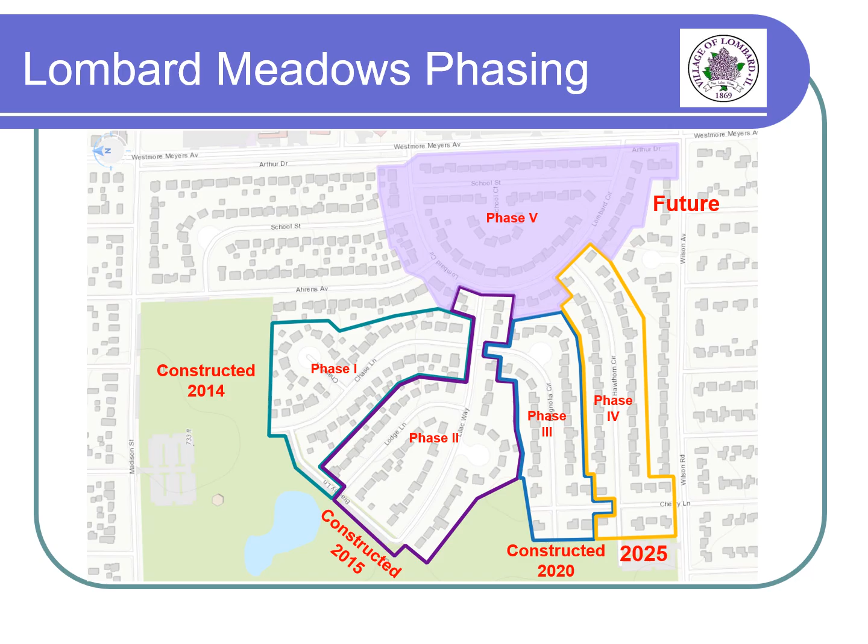Here's a closer look at the Lombard Meadows Phase 4 project area, which is the focus of this presentation.

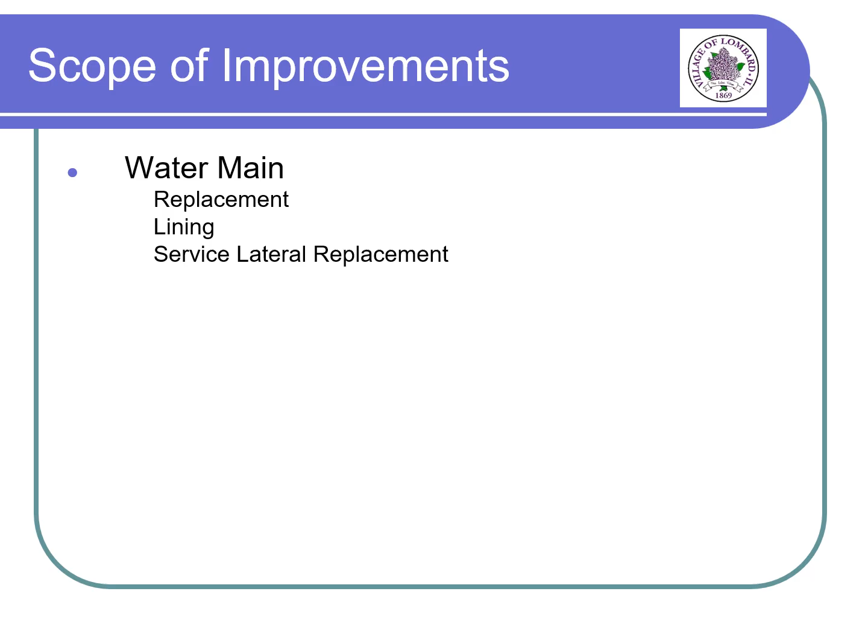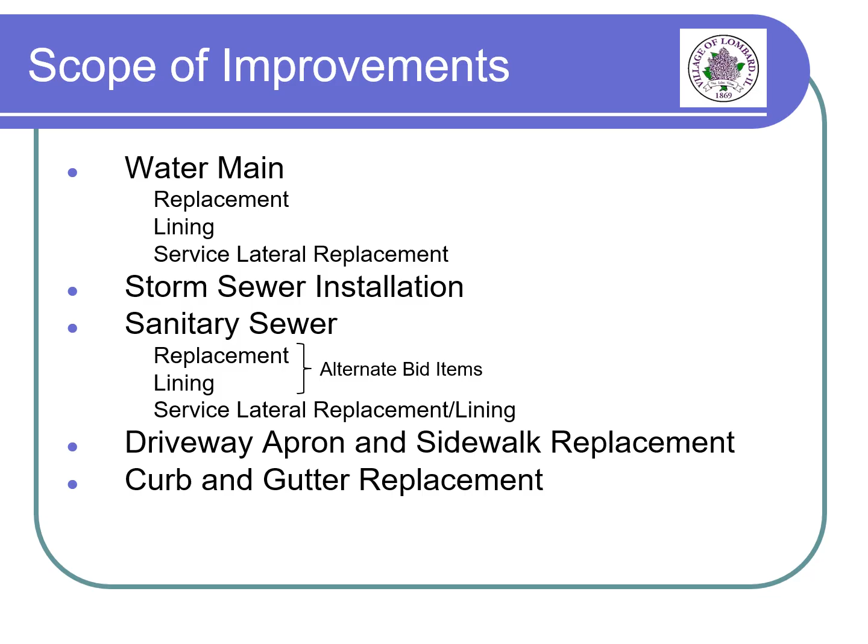The scope of improvements includes the following: replacement and lining of the water main and replacement of service laterals, installation of a new storm sewer system, replacement and lining of the sanitary sewer, including the replacement or lining of the service laterals, replacement of driveway aprons and sidewalks, removal and replacement of curbs, gutters, and asphalt pavement, and replacement of light poles and fixtures.

Now, let's dive into more detail on each of these items.

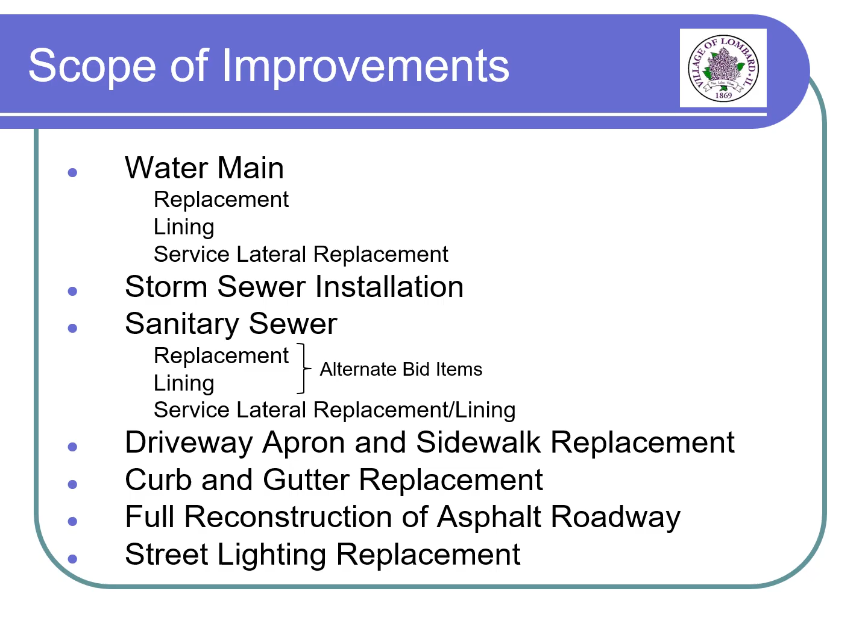The existing water main along Hawthorn Circle and Cherry Lane is primarily 6 inches in diameter and has experienced a history of water main breaks. To address this, the water system will be upgraded to meet the current village standard of 8-inch diameter ductile iron pipe. New water services will be installed from the upgraded main to the property line, each including a new service box. Additionally, new fire hydrants will be installed approximately every 300 feet on center.

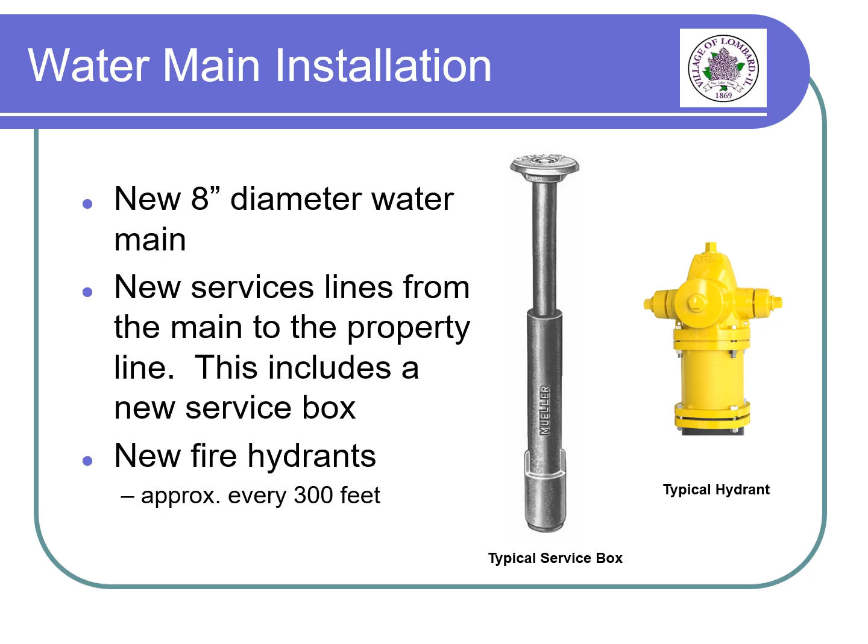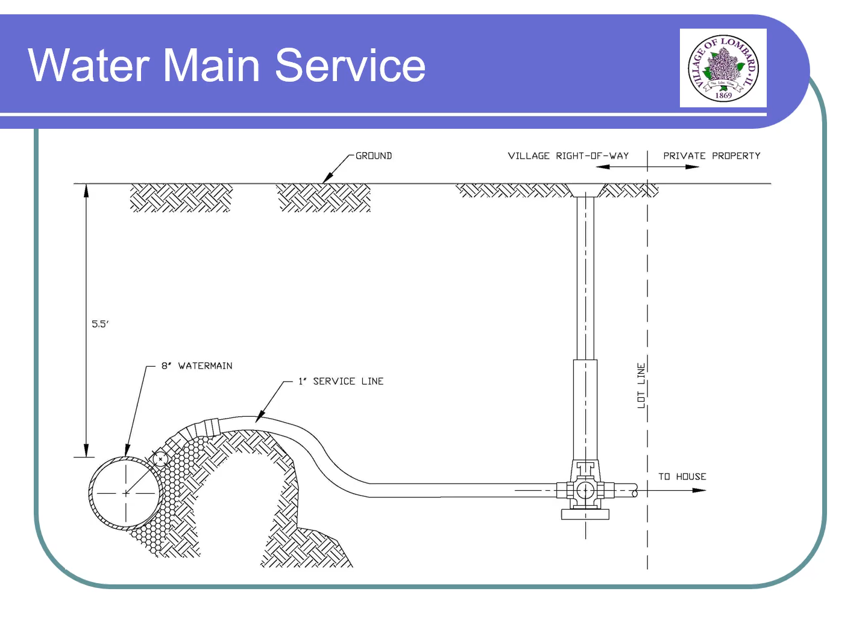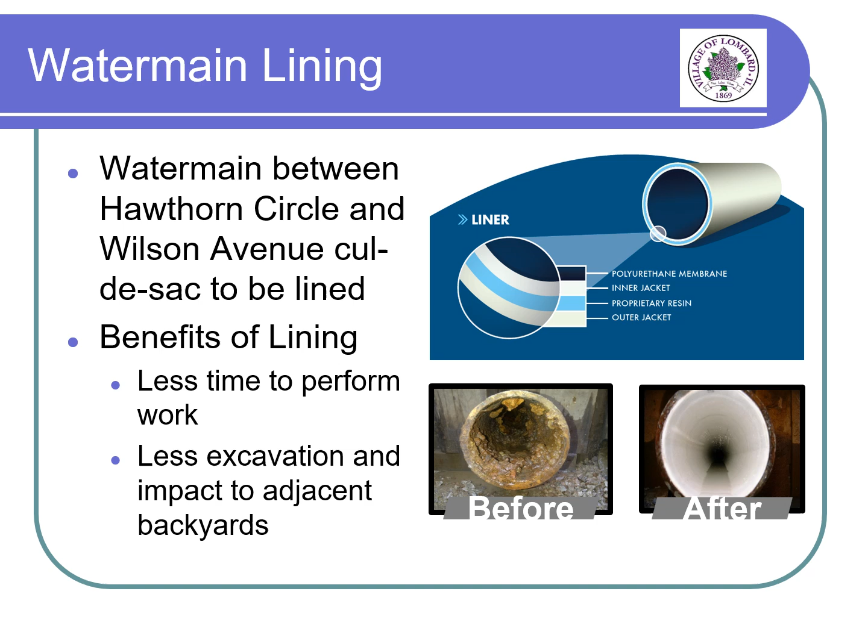There is a 6-inch water main beneath the sidewalk that runs between the side yards of properties on Hawthorn Circle and the cul-de-sac on Wilson Avenue. Like the water main on Hawthorn Circle, this main requires attention due to its age and the increasing likelihood of a future break. However, rather than replacing the main through traditional open excavation, it will be rehabilitated using a trenchless technology called cured-in-place piping. This process restores the structural integrity of the water main while minimizing disruption to surrounding private properties. The result is a water main that functions like new.

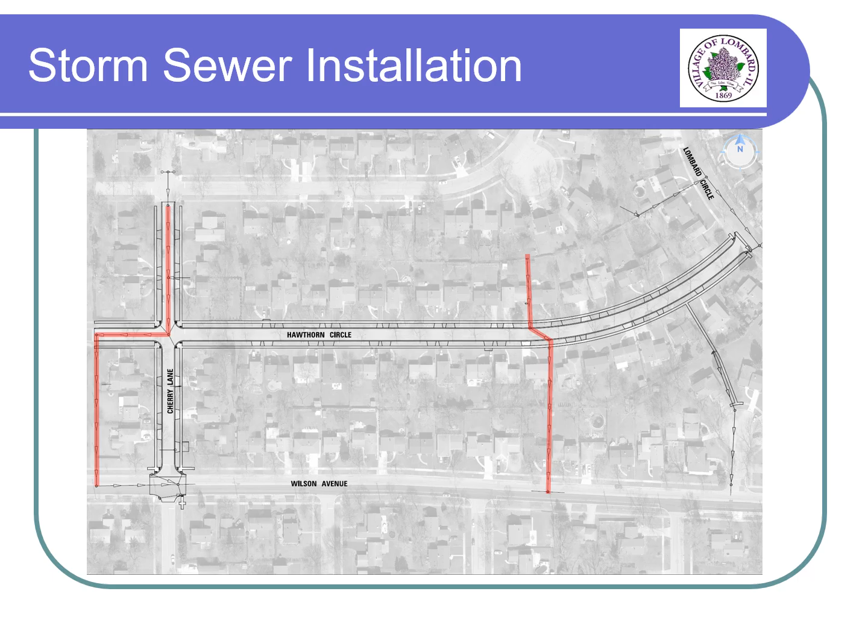There is currently no mainline storm sewer on Cherry Lane between Hawthorn Circle and Wilson Avenue, nor is there a mainline storm sewer on Hawthorn Circle. Only a limited number of inlets are located along the curb line. In the existing configuration, storm sewer pipes run through the side and rear yards, connecting to the mainline storm sewer on Wilson Avenue. To improve drainage, a new mainline storm sewer will be installed beneath both Hawthorn Circle and Cherry Lane, with additional inlets placed along the curb line.

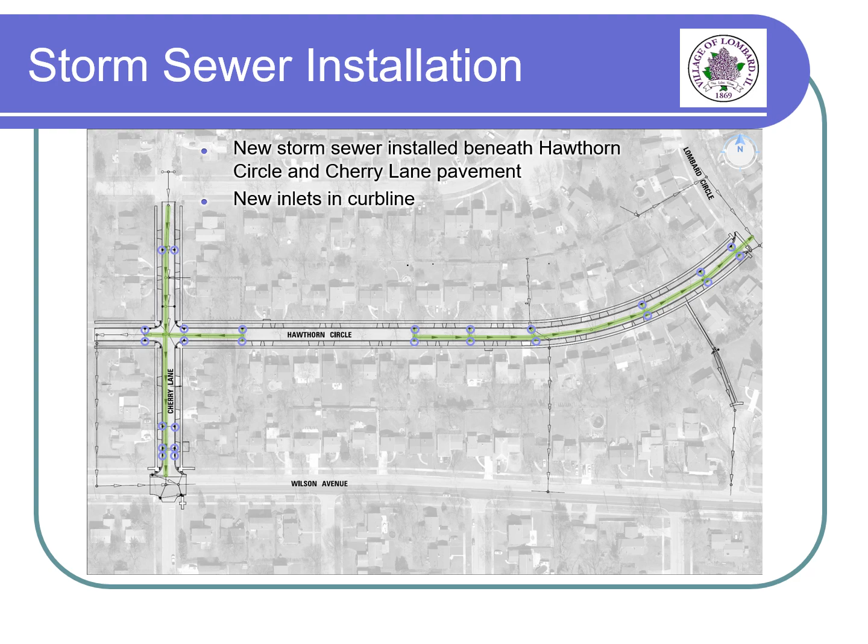The existing sanitary sewer main is in poor condition. In areas where the pipe has significant structural deterioration, operational issues, or sags, the sewer will be replaced. The main is typically located in the parkways, and to minimize the impact on the existing mature trees, sections of the main in semi-satisfactory condition may be rehabilitated using cured-in-place piping. This lining restores both the structural and operational integrity of the main while reducing groundwater infiltration.

However, in some cases, complete replacement of the main may be more cost-effective. As part of the bid package, an alternate bid option will be included to compare the costs of cured-in-place lining versus traditional open-cut replacement.

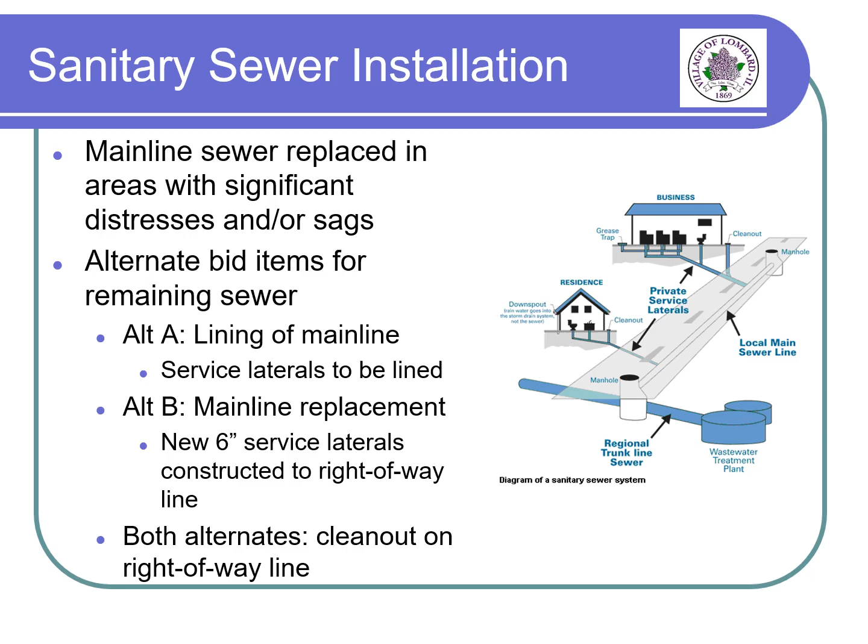As part of the replacement work, new sanitary service lines will be constructed from the main to the property line. If lining is chosen, the sanitary services connected to the lined sections of the main will also be lined. Additionally, all services will include a cleanout at the right-of-way line. This cleanout will allow the village to maintain the section of the service from the property line to the sewer main and help determine whether any future backups occur on the public or private side of the sewer service.

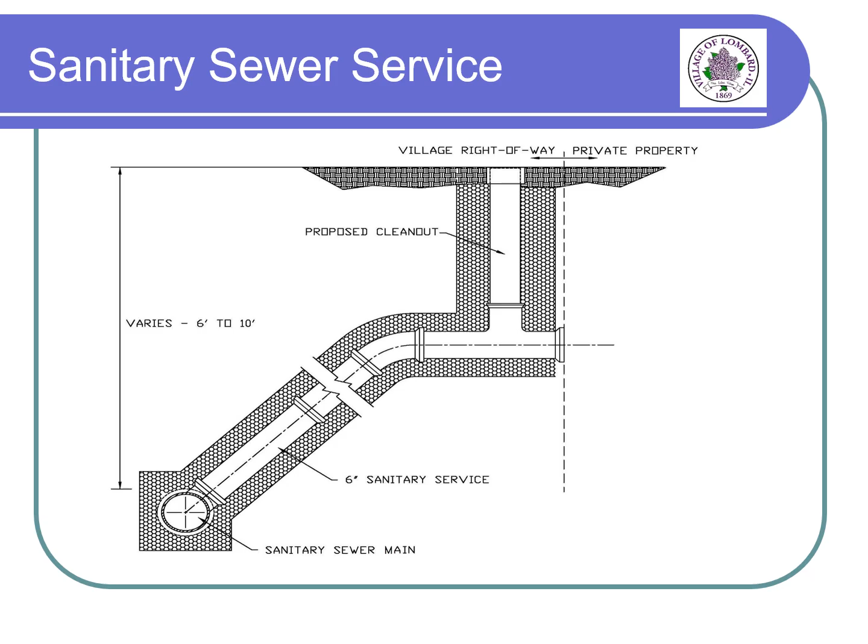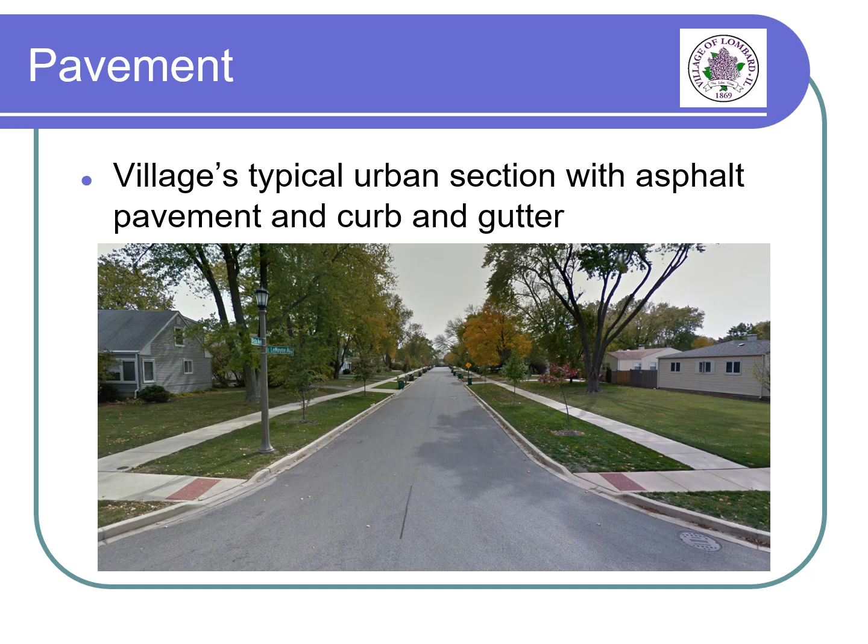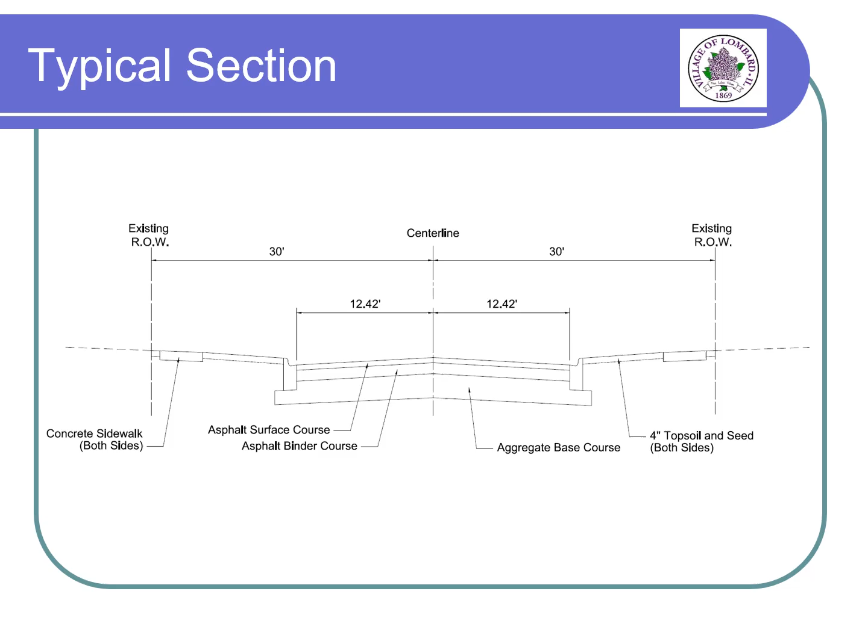The existing sidewalk connection between the cul-de-sac on Wilson Avenue and Hawthorn Circle is being replaced to address years of lifting and settling. Additionally, there are 2 corrugated metal drainage pipes that run beneath the sidewalk that serve as part of the rear yard drainage system.

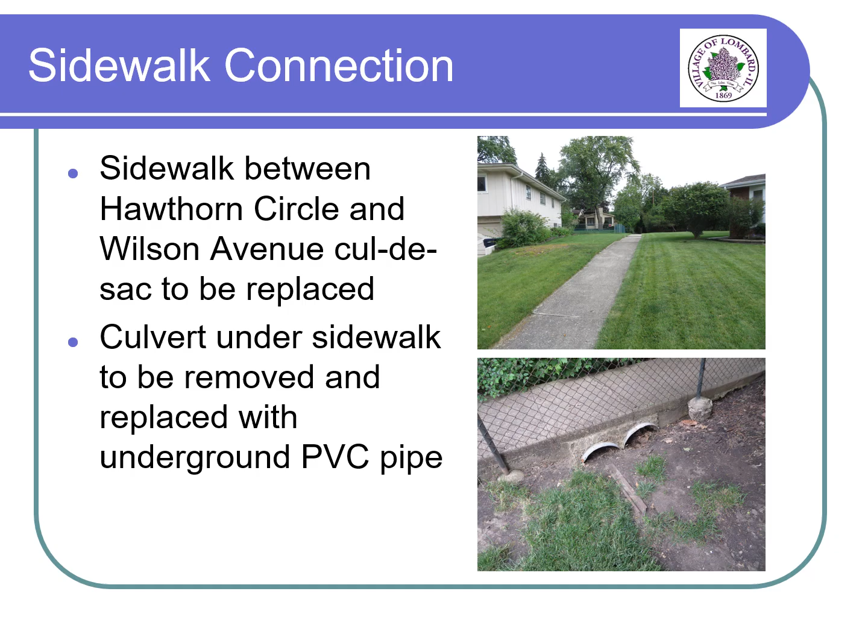Over time, sediment has accumulated in these pipes, significantly reducing their effectiveness. These pipes will be removed and replaced with a new underground pipe that will directly connect to the backyard drainage structures.

There are existing streetlights within the project area. These lights will be removed and replaced with the village's standard concrete pole and LED fixture. These fixtures will provide more uniform roadway lighting as well as decrease electricity costs.

The new lights will be connected to the lighting controller that was previously installed on Chase Lane in 2014.

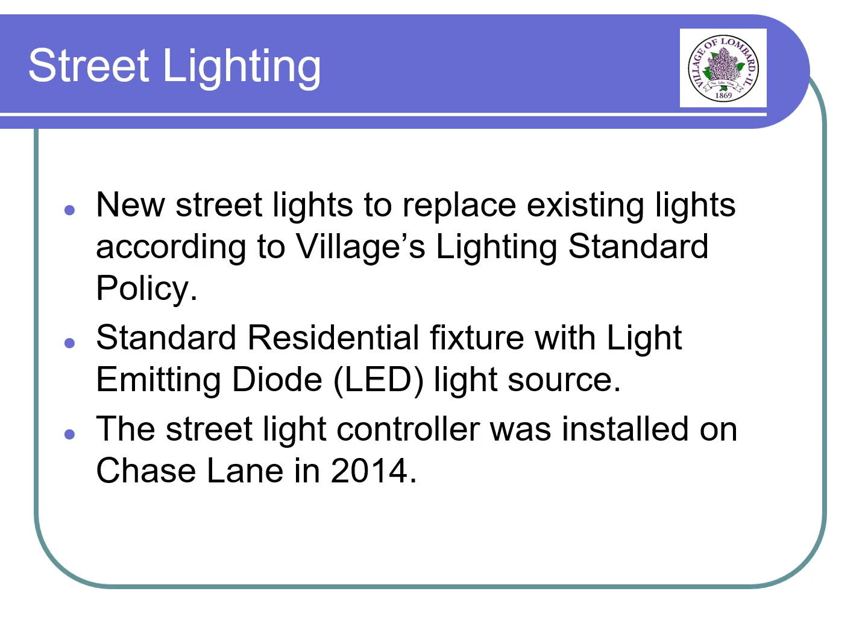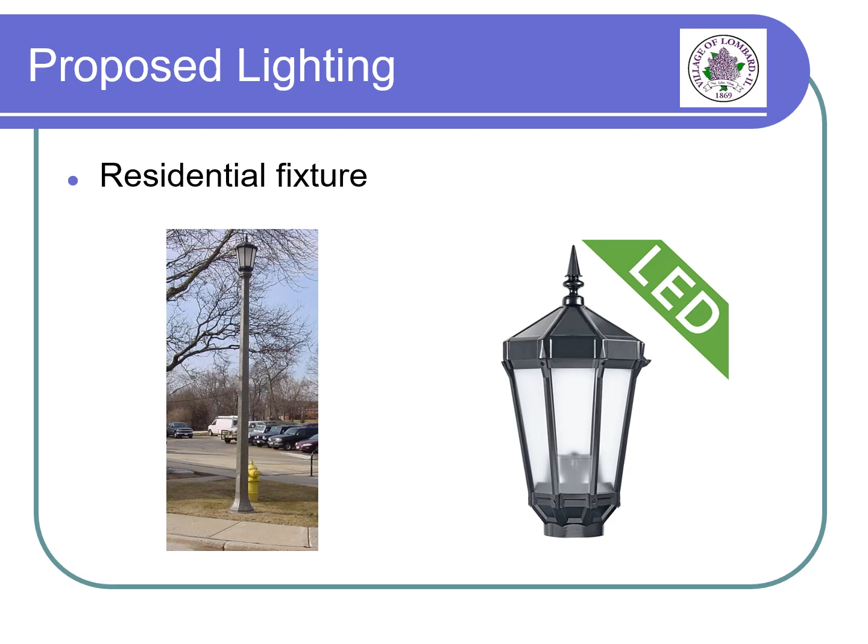My name is Ray Schwab, and I'm a civil engineer and capital improvement project manager with the Village of Lombard.

I, along with the on-site resident project representative, will be your primary points of contact during construction. The on-site representative will be selected from the village's list of consulting engineers and will be identified in the project

correspondence you will receive at the start of the project. Bids for the project are due on February 25th and are anticipated to be presented to the Board of Trustees

on March 6th. The village and the selected contractor will conduct a pre-construction meeting about 2 weeks after the award.

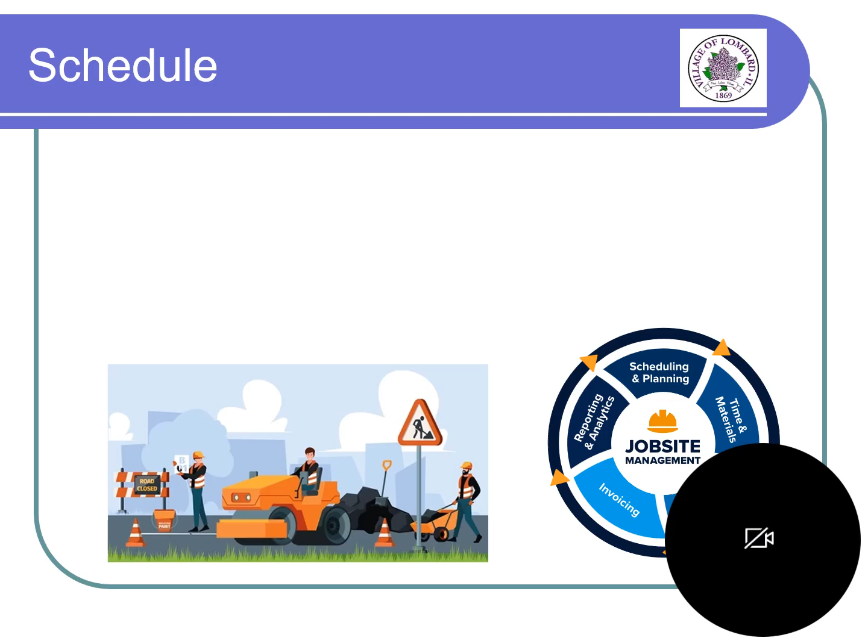At the meeting, the village and the contractor will determine a construction start date. Based on the status of contracts, bonds, and insurance, along with the resolution of any natural gas, electric, and telecommunication coordination issues, work should begin in April and conclude in October.

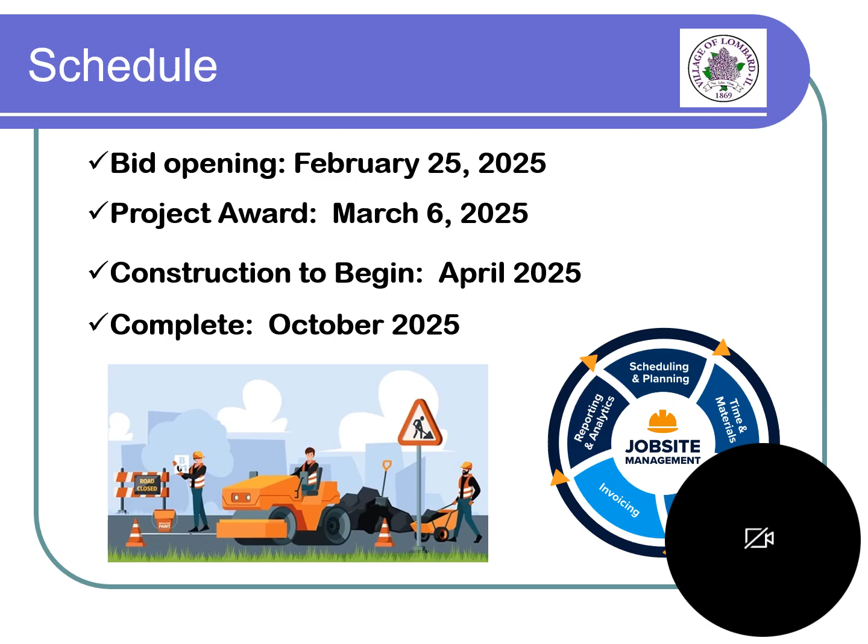The construction sequence is expected to follow the order listed in the slide. The contractor will begin by setting up traffic control at the project boundaries. Next, underground utilities will be identified and the street regulatory signs will be removed.

Trees designated for removal will be marked.

Construction should then proceed as follows. Number 1, installation of underground utilities. Number 2, construction of curb and gutter, electrical work, asphalt pavement, and sidewalk.

Number 3, restoration of driveway aprons. Number 4, seeding and placement of the final layer of asphalt and the testing of the new lighting system.

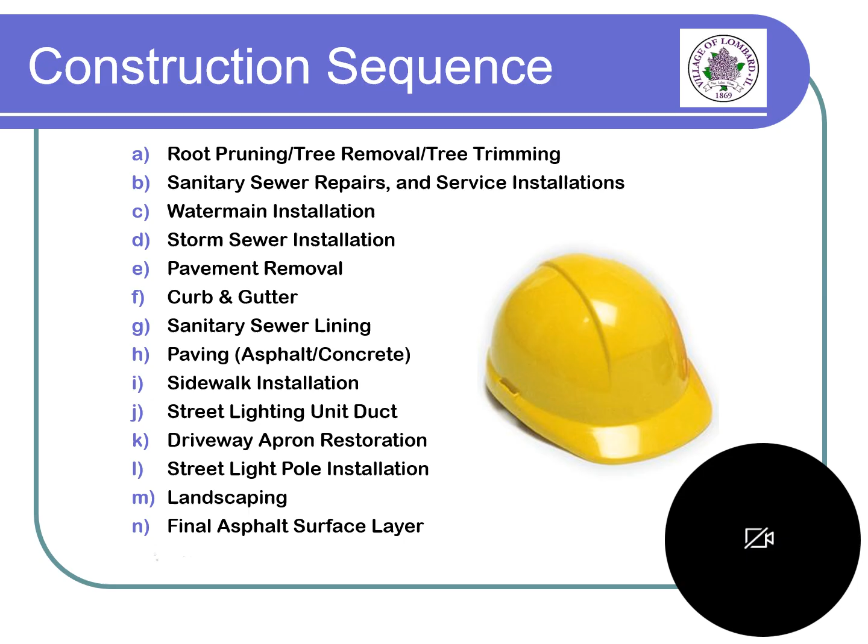Households within the construction area will receive an initial newsletter outlining what to expect during construction, as well as information on how to sign up for the Notify Me service.

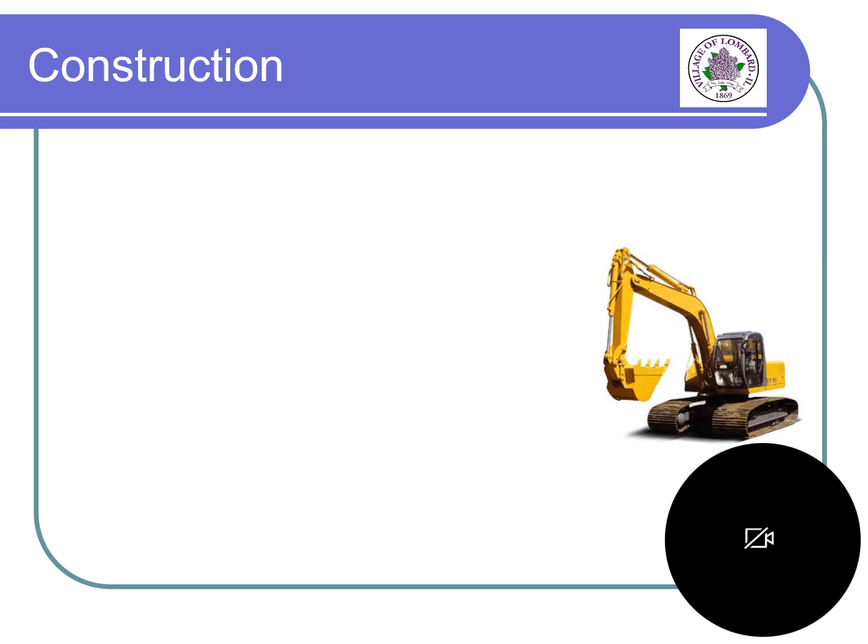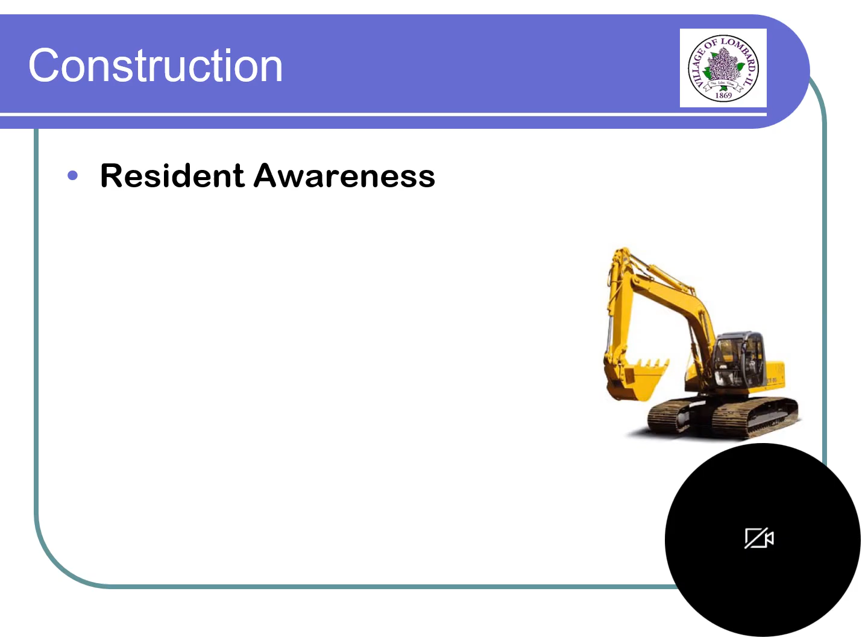Throughout the construction process, the village will keep residents informed with a series of newsletters and notices. These newsletters will provide updates on the project's progress and highlight any important information residents should be aware of.

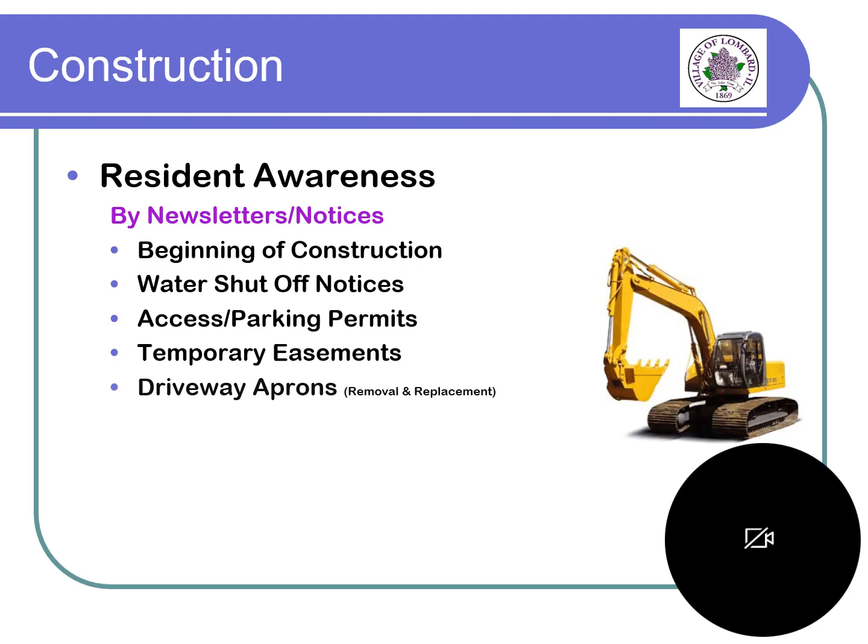They will be mailed approximately every 3 to 5 weeks. In addition, special notices will be hand-delivered prior to any activities that may disrupt access, water or sewer service, or in the event of any unforeseen circumstances.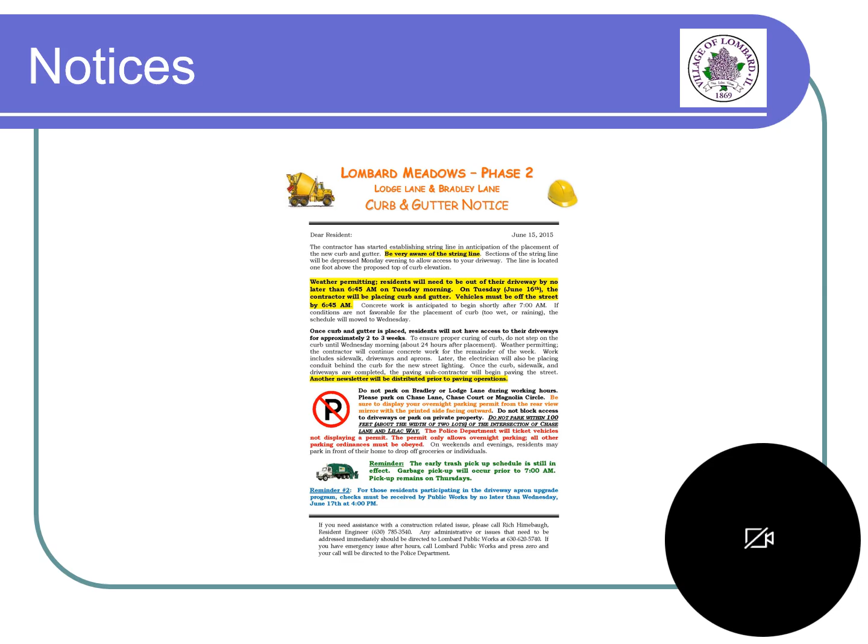Another form of advance notice are door hangers. They address pending driveway access and/or water sewer service disruption.

Typically, water service will be disrupted when the water lines are transferred from the old to the new water main. During underground construction, there may be situations where unforeseen circumstances may result in the disruption to service.

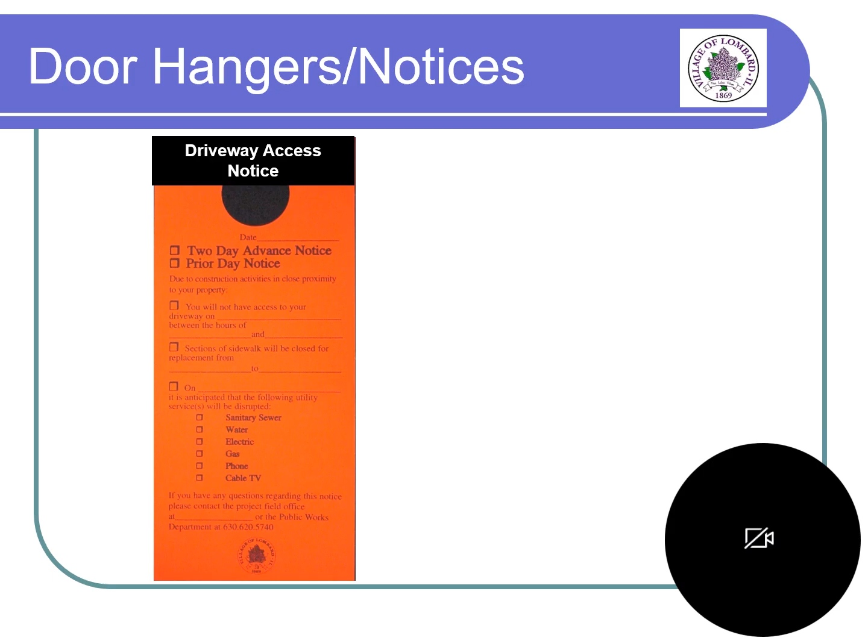In this event, the on-site representative will contact the household to inform them of how long the disruption may be. It is recommended that during underground construction, residents keep a gallon of water in their refrigerator in the event of any unexpected water service disruption.

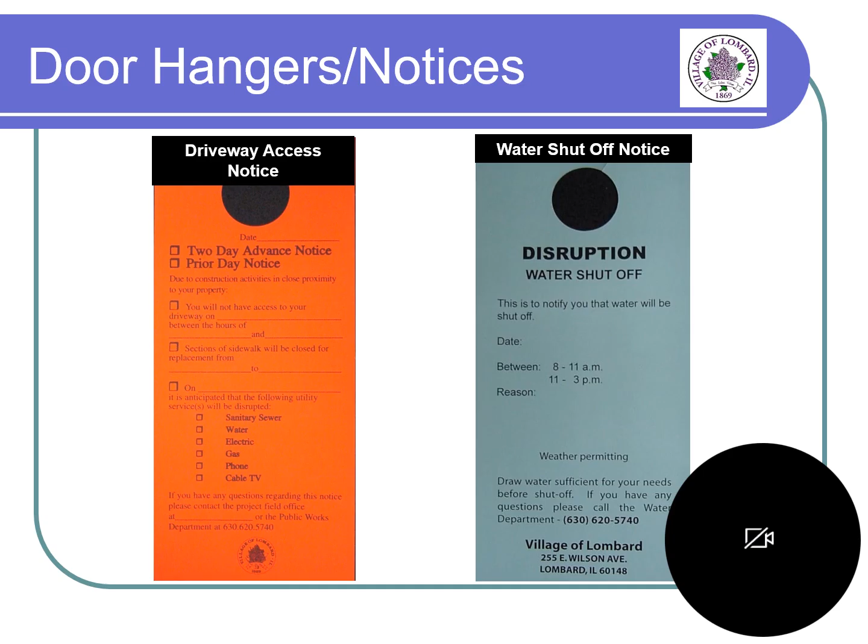The village also offers a digital communication service called Notify Me. Notify Me is an email service that allows residents to receive updates and information about specific projects or events.

Before construction begins, the village will send out instructions on how to sign up for Notify Me. Residents can also visit the village's website to sign up for the service prior to receiving the letter.

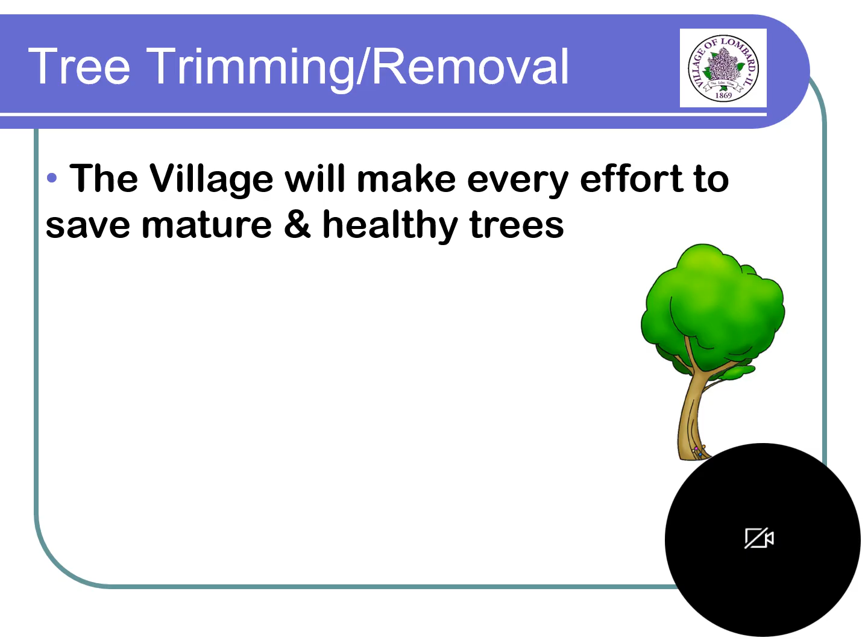Returning to some of the details related to construction, trees that need to be removed will be marked with an X. Tree removal is based on their condition as evaluated by the village forester. However, a few trees will be removed due to unavoidable conflicts with the installation of new underground utilities.

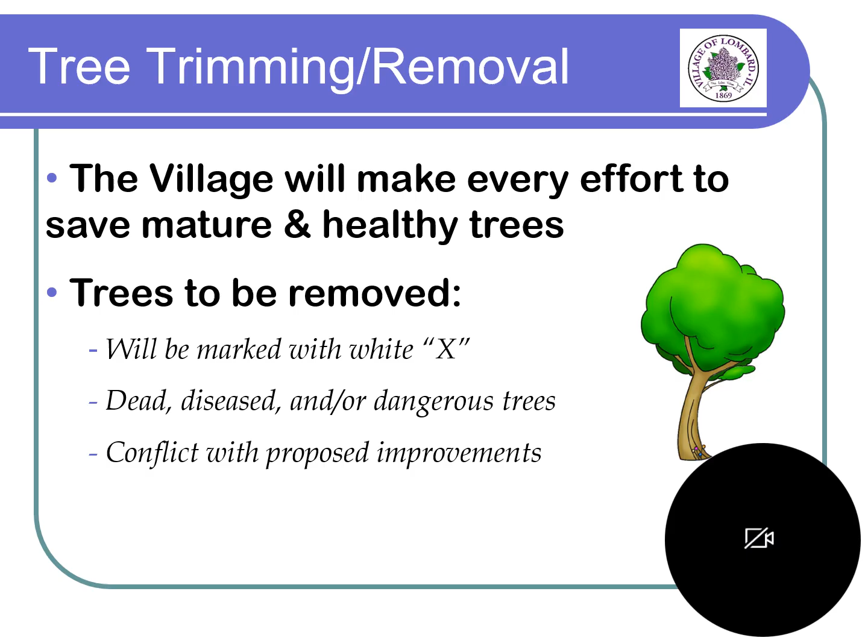New parkway trees will be planted in the spring of 2026. Residents eligible for a new parkway tree will receive a letter in late February or early March of 2026. The letter will include a list of available tree species. Residents will be able to select the tree choices suitable to their parkway. Tree requests will be processed on a first-come, first-served basis. Please note that the number of trees available for each species is limited, as they are sourced from nurseries.

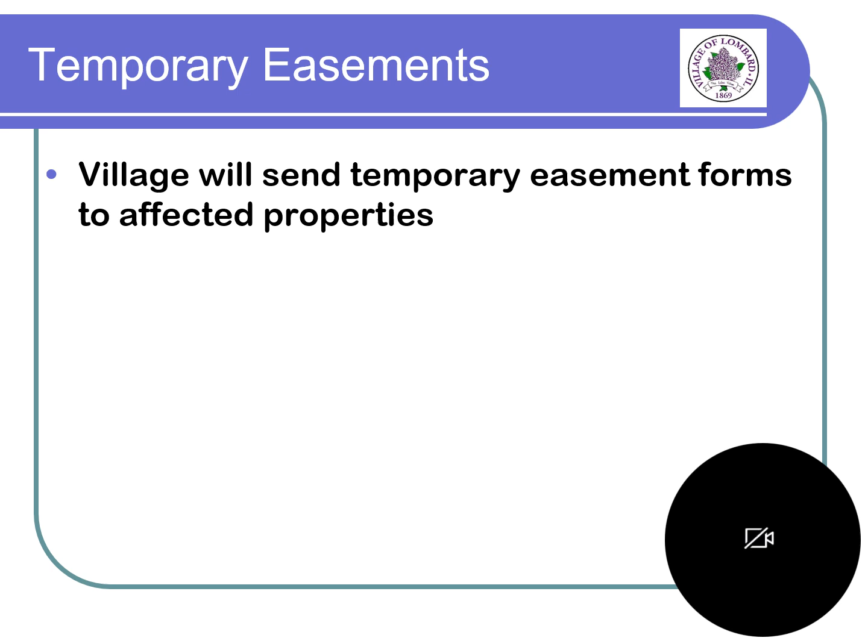If the village needs to access private property, the property owner of record will receive a form granting permission for the contractor to enter and perform any necessary work. Any work performed on private property will be done at no cost to the property owner. Common reasons for temporary easements include modifying driveway slopes, regrading private property to accommodate changes in grade in the right-of-way, or making adjustments to water and sewer service connections.

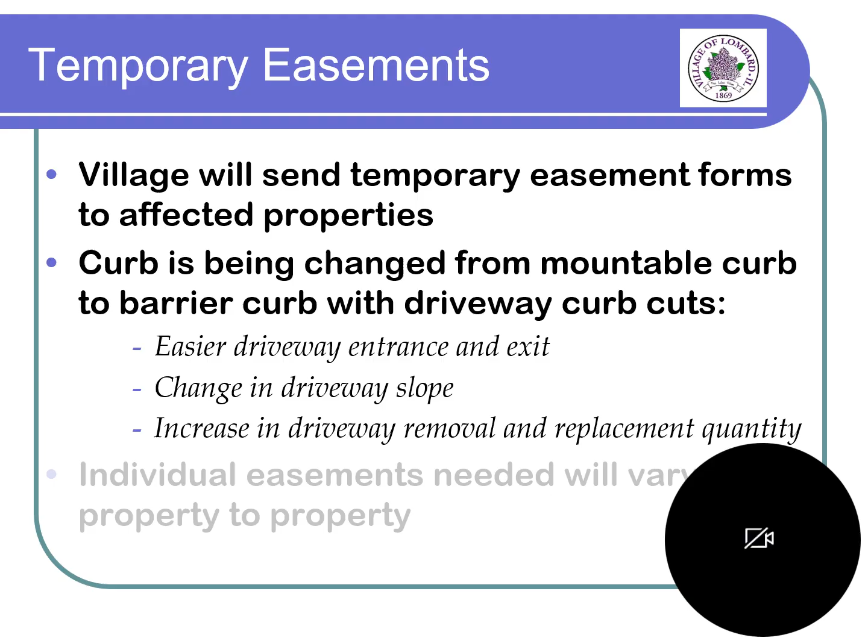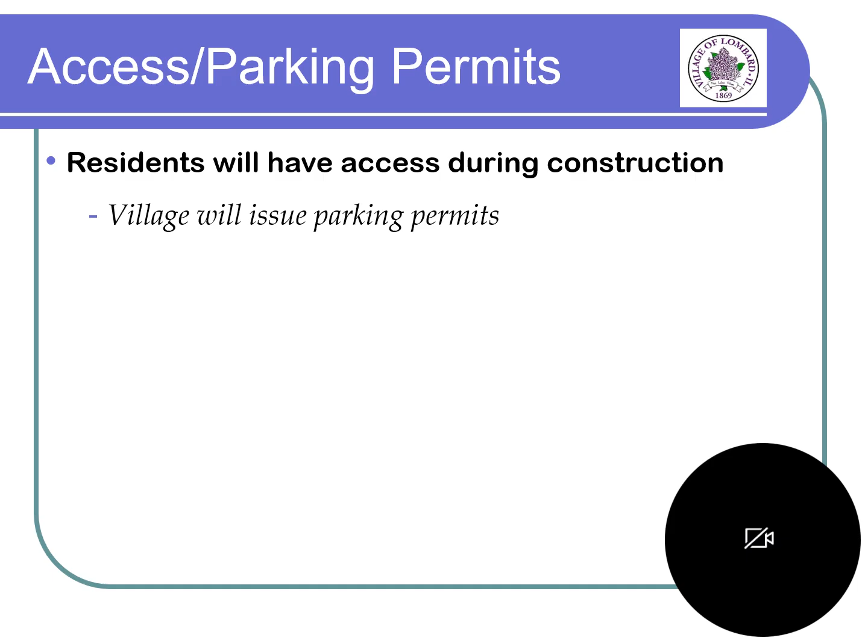Residents will need parking passes during construction. When the contractor is working on the curb and gutter, the stone base of the roadway, asphalt pavement, or the stone base of driveway aprons, residents will not be able to access their driveways. The village will mail two parking passes per household prior to when any restrictions on driveway access occur.

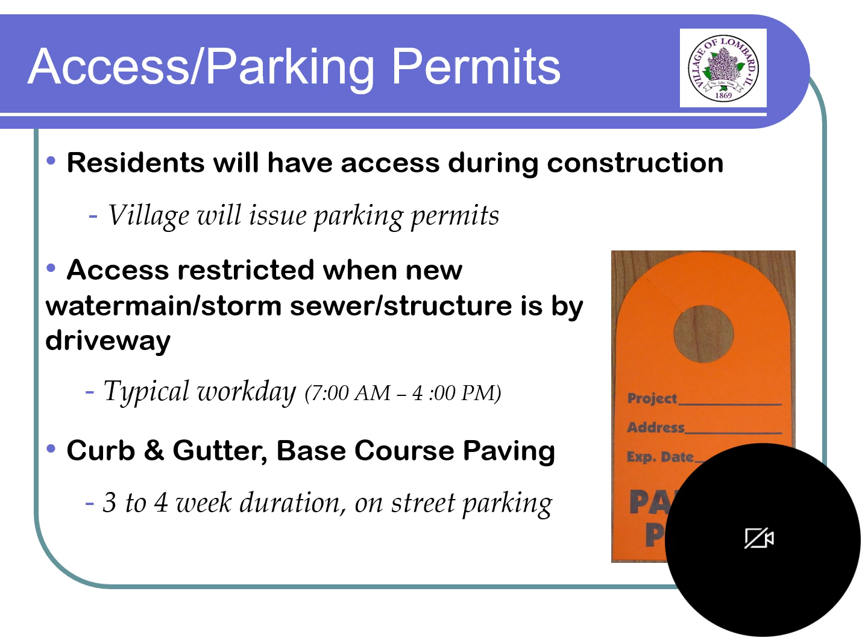Residents will be able to park overnight outside of the work zone. If any additional passes are needed, simply contact Public Works and extra passes will be provided. Please be sure to display the passes, as the police department will be monitoring overnight parking areas. Park only in areas where parking is normally permitted.

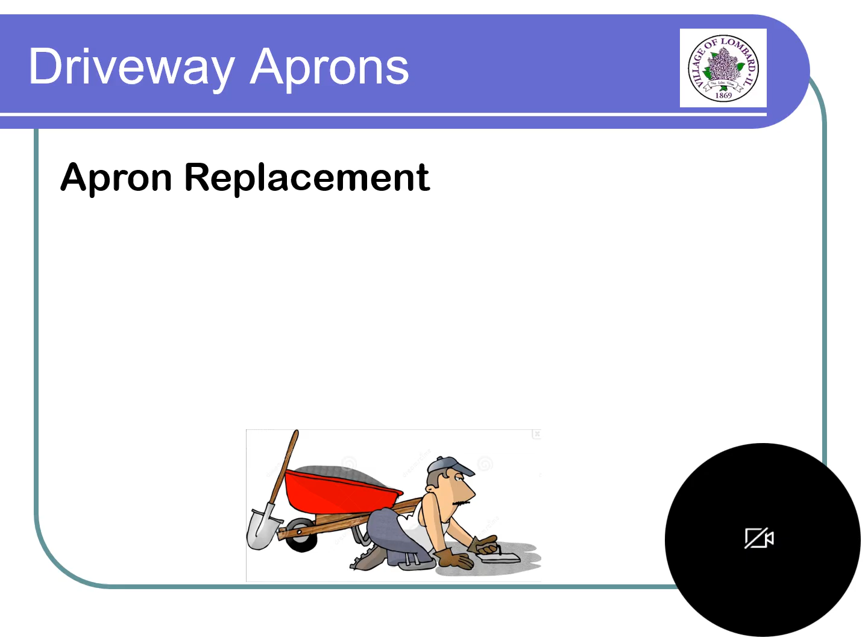Driveway aprons will be replaced with the same material currently in place. However, if a resident wishes to change their apron from asphalt to concrete, the on-site project representative can provide a quote for the difference in the village's costs between the two materials. In the unlikely event that the driveway apron bid price for concrete is lower than that of asphalt, all aprons will be replaced with concrete.

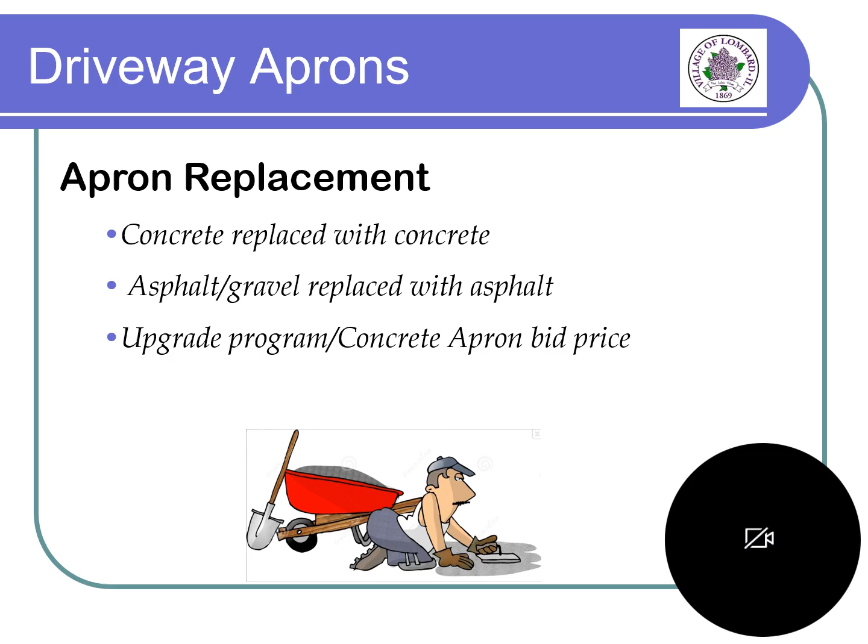Please note that the contractor is not obligated to perform work on private property. If any work on private property is requested, a permit must be obtained through the Community Development Department before the work can take place. Public Works can assist with this process.

Sidewalk will be replaced in kind on both Cherry Lane and Hawthorn Circle. To comply with ADA regulations, ramps will be installed at each intersection to ensure accessibility for all individuals. These ramps will be designed to meet the required standards for slope, width, and surface texture, making it easier for people with disabilities to navigate the area.

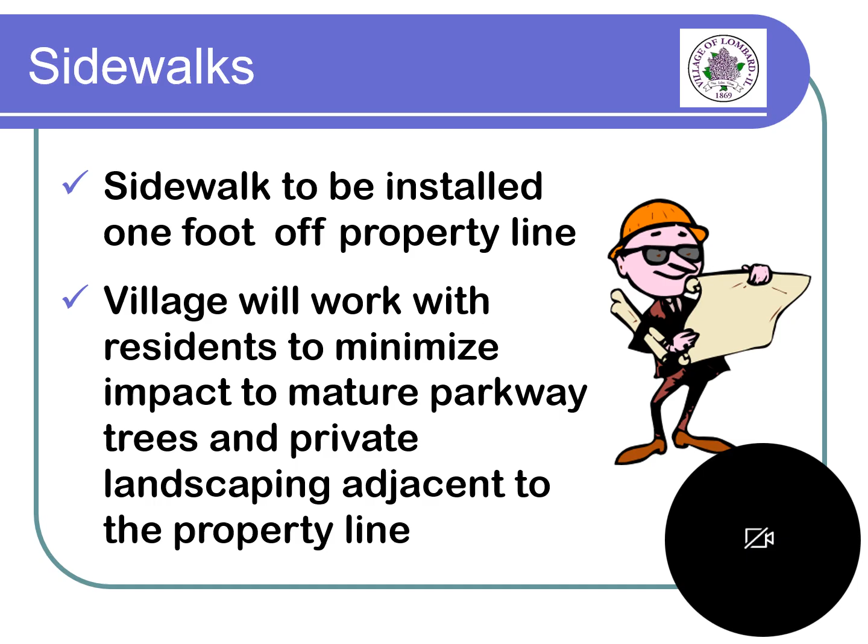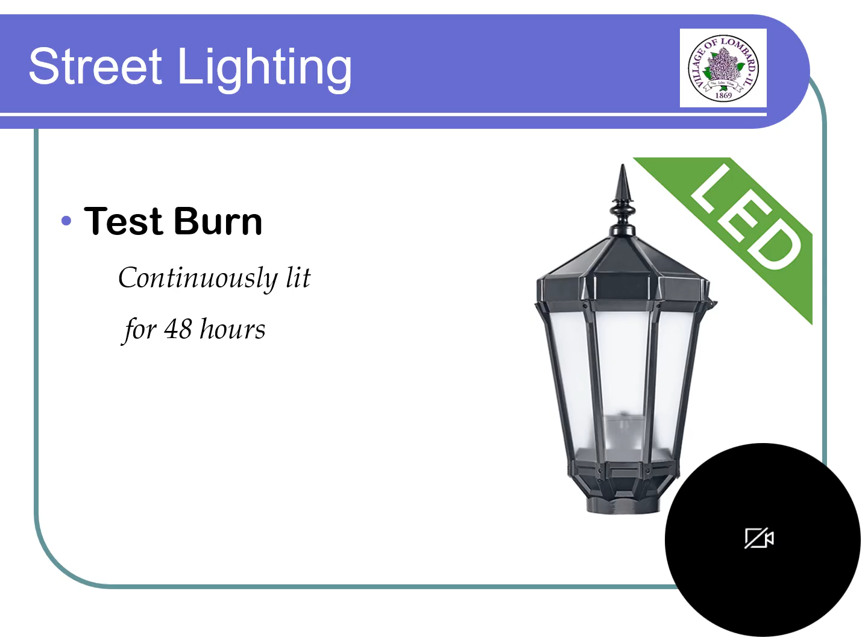New light poles with LED fixtures will be installed, and they will be equivalent to those used in the previous Lombard Meadows projects. Once construction is almost complete, the village will conduct a continuous 48-hour test burn of the new street lighting system.

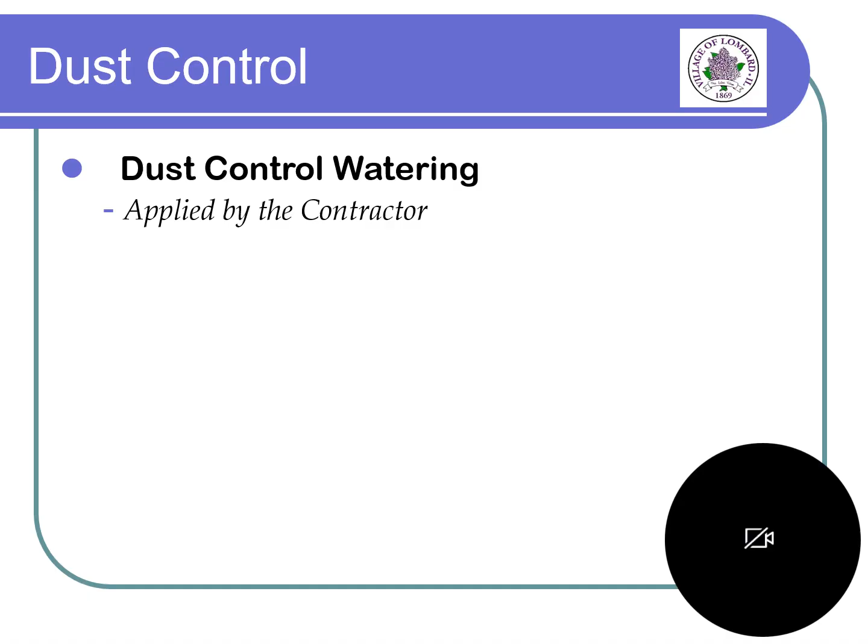Construction can be messy and dusty. Village staff and the on-site consultant will work with the contractor to apply water to help control dust during particularly hot and dry weather periods.

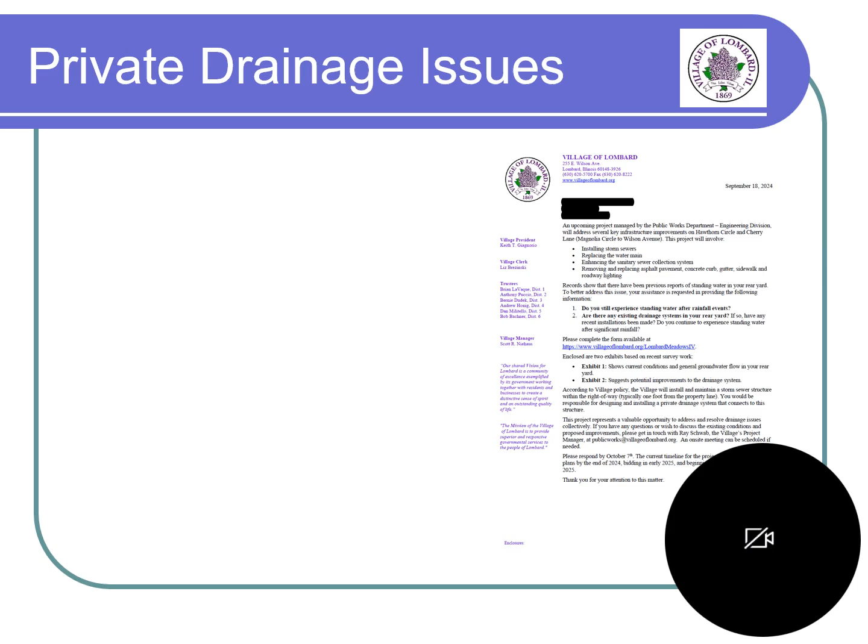The village has sent initial correspondence to residents with a documented history of drainage issues in their rear yards to determine whether these concerns persist, and if so, to what extent. As part of this project, the village will strategically install new curbline inlets to accommodate potential future connections.

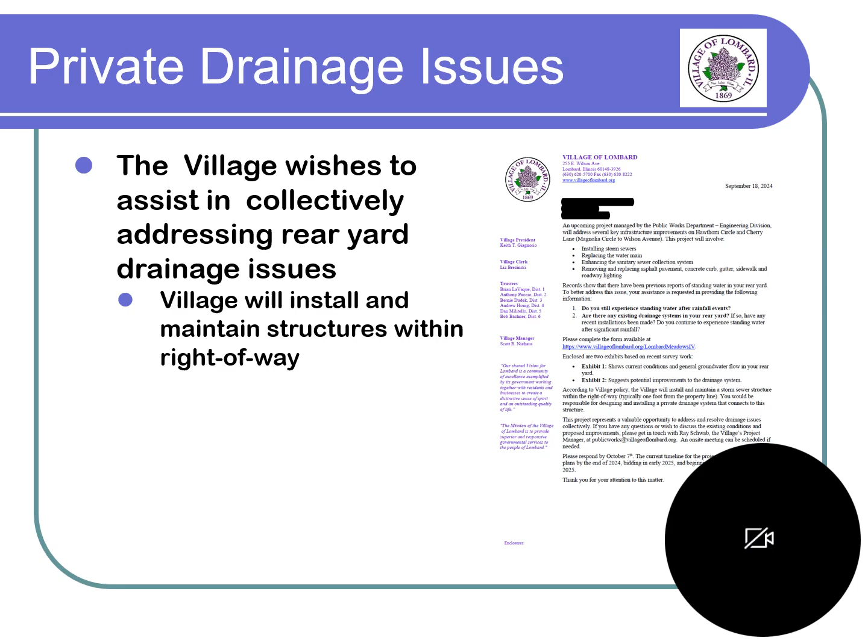Property owners with rear yard drainage issues will be responsible for installing a private drainage system that connects to these inlets. A residential drainage grant may be available to share the cost of this system in the form of a reimbursement if eligibility requirements are met.

If your household is experiencing rear yard drainage issues, Jeff Tomzak, PE, Private Development Engineer, will be available at the public information meeting to discuss the matter in detail and provide information on potential solutions, grant funding, and the specific responsibilities of both the village and homeowner.